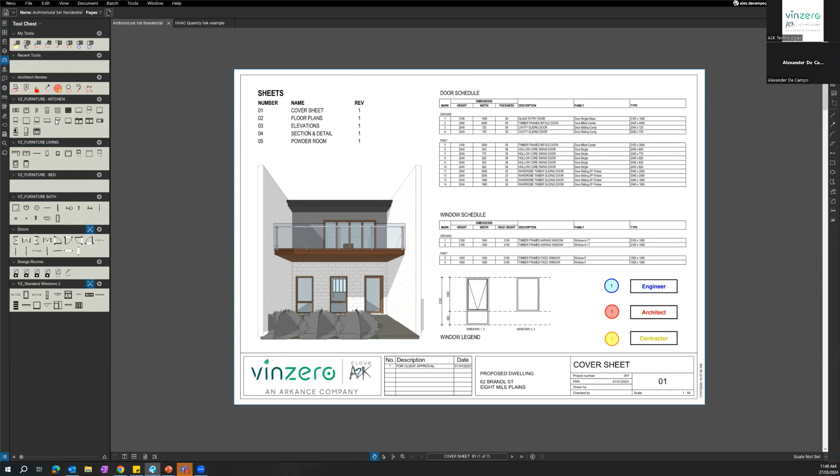Firstly, look at our tool chest, because these tools are how we speak to the program, how we add our context in. Typically on the side, for any beginners, our tools on the right hand side, you can grab any of these tools from the top as well, markups, anything here, chuck it on the drawing, MS Paint style, pretty easy. Where Bluebeam comes in really handy though is you can edit these, fill them with colors, add customization options, dash lines, hatch patterns to the whole thing. They can get really unique. Doing that every single time you want to represent a certain thing is tedious.

So we have our tool chest. They allow us to save certain properties. This tool chest, for example, here in the tool chest panel, the architectural review, we can click on one of these, and that's the same as this tool up here, except it's preset to have a certain color attached to it.

We go back to our standard Revu profile. Our profiles at the top under the Revu panel. When we change profiles, we can change between these presets. So when I go, for example, between these two that I've established for myself, go to the engineering one, and I have a bunch of different tools loaded in that library.

So how we get that into profiles first, we can either just select the basic standard profile. This is one that comes with Revu. It's got these different tool chests. To move on to make a new one, click on that profiles panel, manage profile at the bottom.

Then add just a new one in there. You can call that electrical, for example. And so that's going to be our electrical engineering. We can then go into our tool chests, untick the ones we don't want to see. So I don't need these or these. I just want a few basic ones around.

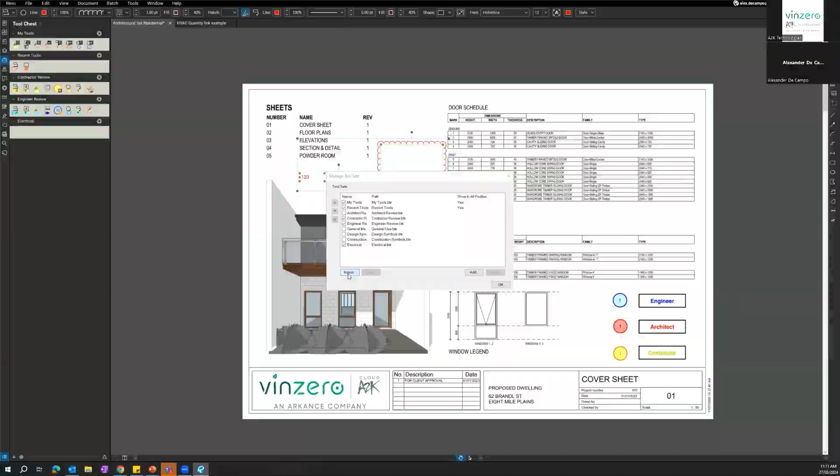How do we do that? Under tool chests, manage, select the one you want to share, click export, and then that pulls it out of the program. You can save it anywhere on your computer, send that file off. When they get it, they do the same thing. They go tool chests, manage, and then import, find whatever one that you have shared with them, open that up, and then cool, you've loaded in your new tool chest that way.

It's very quick and easy. I can chuck any of these symbols in anywhere I want. I'll go back to my other profile being just that standard Revu profile, and I'll use these as a good example to start with. If we go down to, where's my panel?

We run into a natural issue. One of my toolbars is missing. Since I ran through it, I'll move to show you what's going on. Under tools and toolbars here, the status bar, you can turn that back on. That's what I was looking for. I didn't have it up.

There we go, sorry for that. Sweet, turn a few of these back on. I was having graphical glitches, but now it's back and I can see the thing I want to see.

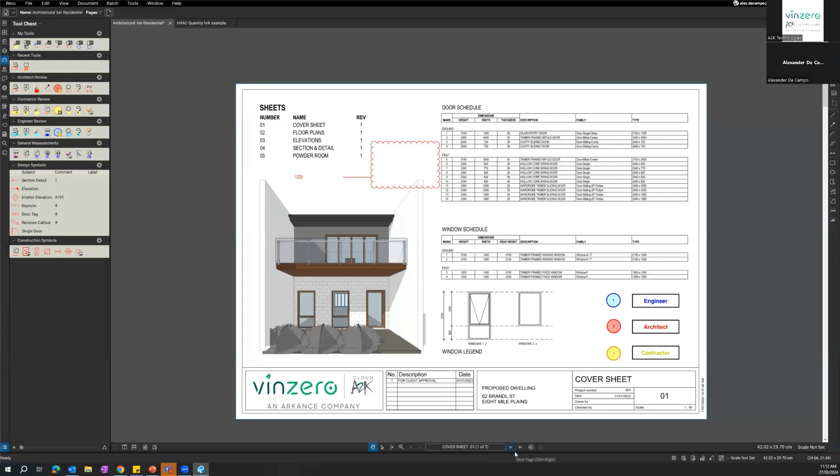There we go. Now from here, go to the next couple of pages. Here's a page I created earlier for you all. Nice and messy, right? It all looks really just like gibberish. That's just a bunch of these different tools placed on.

The reason I do that is so we can show you this markups list, and this is the next step of the process. Once you've gone through and placed your comments, arrows, engineering review, highlighted something of interest, or clouded something that needs to be looked at, and everyone's gone through—multiple people in one PDF have done that—it becomes really messy because everyone's working on the same page.

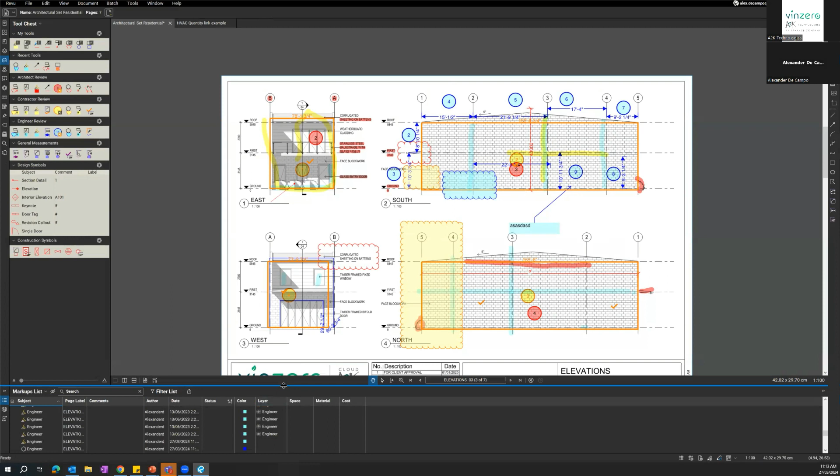So how we can filter that out is where the markups list comes in. You can bring that up by clicking on that blue bar at the bottom, and that'll bring it right up. We can stretch it out, or push it to the side to have more panel space if we want. But yeah, so there it is.

We can grab these and actually use this to filter the data. So first of all is by subject—everything in this tool chest has the same subject, so I can filter it out and see on the side all these markups of architect. Whenever I click on one, it shows me where it is in the actual plan. This markups list is basically just a big library of everything we've actually drawn in this program, or onto this PDF.

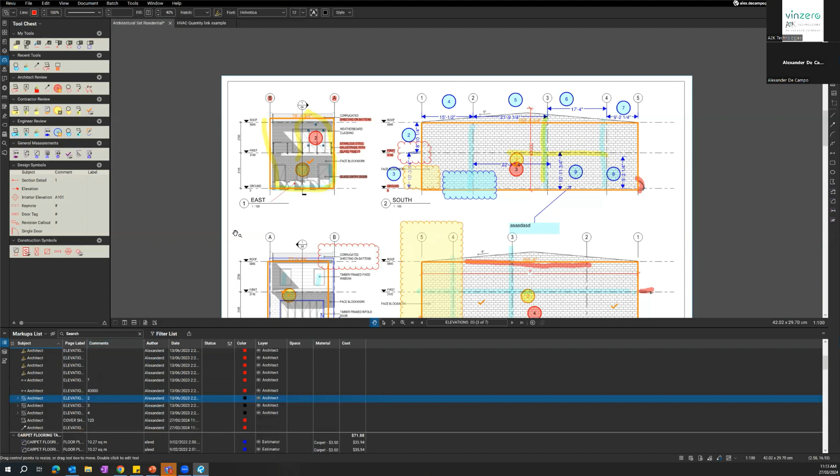So I can select any of these. I can select this architecture one, and it'll drag me to where it's been drawn.

Now for filtering, and where this comes in handy, is under this section here. So we can select filter list and select on the side here above the subject, and we'll have this drop-down box option, so we can select them one at a time. So if I select architect, everything else becomes grayed out, and now I'm only looking at one thing that I want to see.

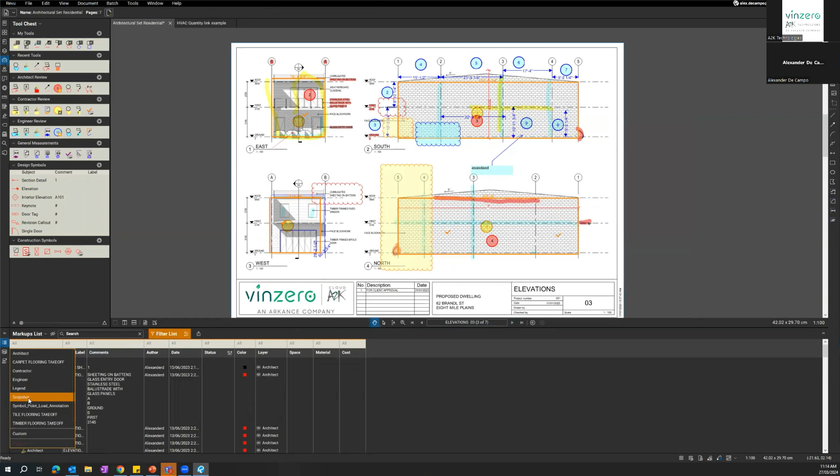I can filter out by engineer as well. I can filter out by the same contractor, and even two at once—so engineer and contractor—and now everything else is hidden. I'm just looking at those two.

So that allows everyone to actually work on the one PDF really easily without it getting messy. Otherwise, the alternative is you have four different sheets for every different industry doing their own comments, etc., and it gets really hard to know what the most up-to-date version is. Now everyone can work on the same page, and we all know quite literally the same page.

But yeah, the next part then—so that's the easy bit, placing your comments, etc. How we get more dynamic info use out of this is with our statuses. So this is where project tracking and management comes in.

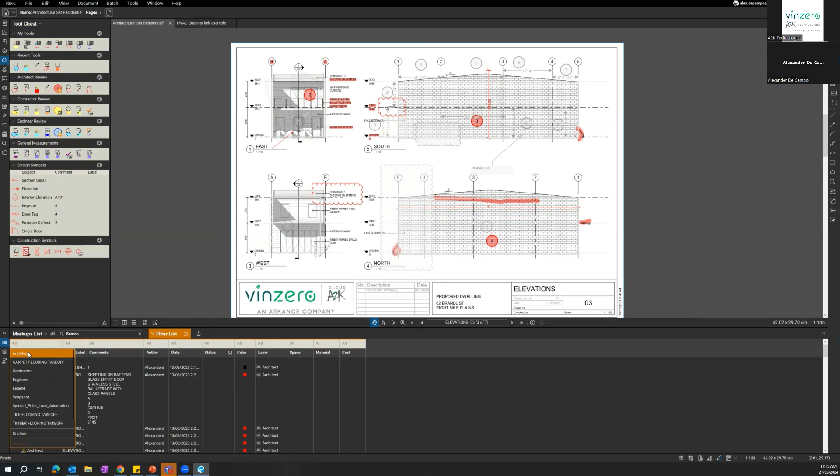Say on this page I'm going through doing my review of each markup as they appear. Let's get rid of those. I want to go down here to this page and say this markup—it's my job now to approve these changes that have been drawn in the drawing. So the way I do that is with my statuses.

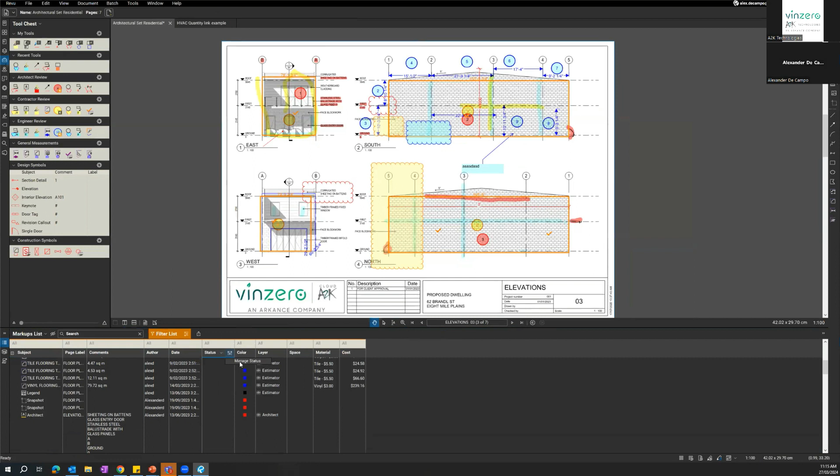So we'll start by creating them by clicking on the status bar here in the markups list and the filter option. We'll click manage statuses. Then we have a pretty standard one—this comes with Bluebeam already: accepted, rejected, canceled. We can create our own list too, so we'll just click add here.

The model is going to be engineering review. So for this we'll have a few different stages—these states on the side are sort of the stages they can sit at. I'm going to add a state and call this...

Accepted, because it's been accepted for it to progress. The next one will be rejected, as in that markup—we don't want that to continue through the project, we don't want those changes to be implemented.

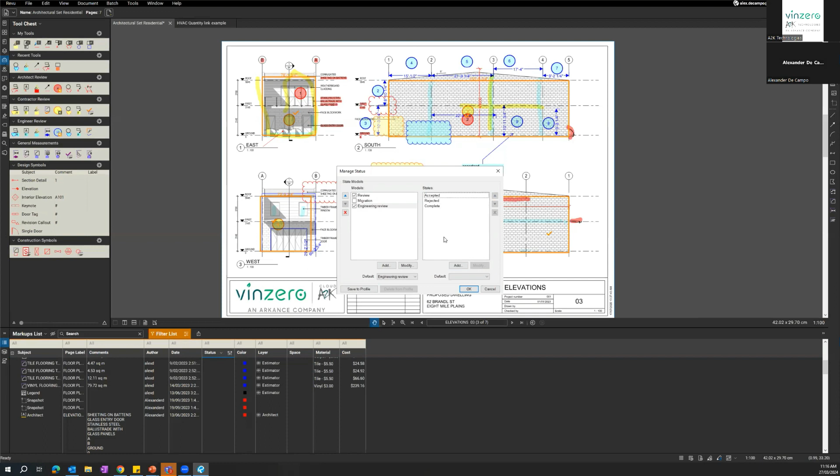And then the next one will be complete, where that change has been implemented into the actual drawings and they're done. Just as an example, you can see anything can be done with these, so it's pretty simple.

But from there, how do we use it? Now that I'm looking at this drawing, I'm going to go through and actually make those changes. I can select this one, right click on that and say, yep, I've looked at this and I want it accepted. I've accepted it, so I can set that status with engineering review as accepted now. And that appears here in the markups list with that information.

Same thing, find another markup. Yep, that one's good to go. Status, engineering accepted.

As I go through, it's kind of hard to differentiate what I've accepted and what I haven't. So that's where the filter list actually helps in this case as well. I can filter by only accepted or only blank. And so when I filter by blank, you can see the ones I've accepted go gray. So now as I tick things off and go, yep, this one's done, it goes gray, knowing that I'm finished with that. It's a really easy way to see my work as I go through this file.

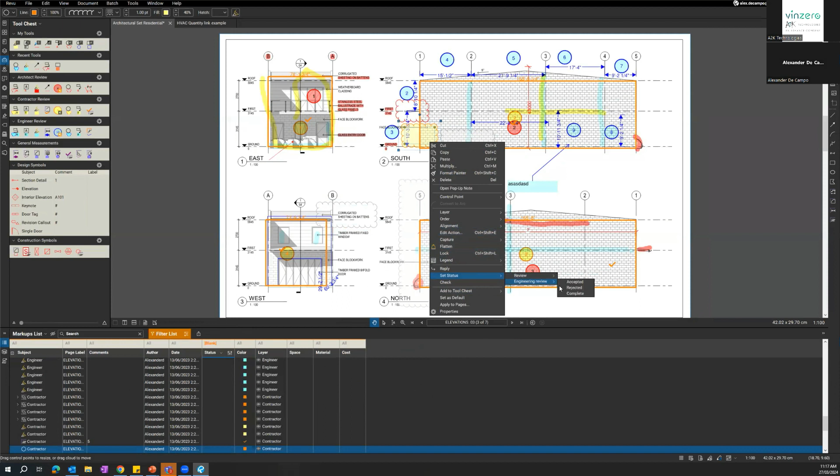And then let's add a few more, go rejected. If you go through page by page, that seems like it might take quite a while, right? Doing it that way, but if you're certain that an entire page is good to go, you can set the status for all of them at once to be accepted. You can set all these, maybe this bottom right half is rejected.

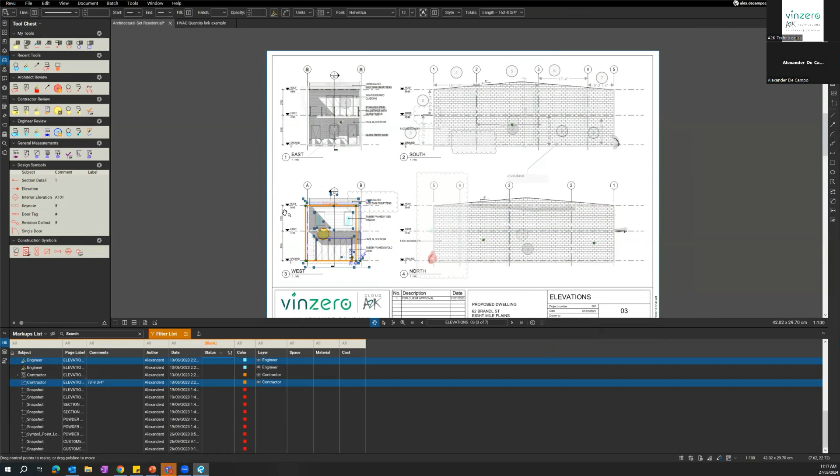And just for the sake of it, we'll say this bottom part's been done. Select all these markups at once, just by holding shift and then clicking and dragging to select multiple. So right click, set status, and then those are complete.

So now I can see on this page, everything's been taken care of. I can unfilter that now just to bring it back to how it was and go through and do the opposite, so I can look at what's been accepted and everything else goes gray.

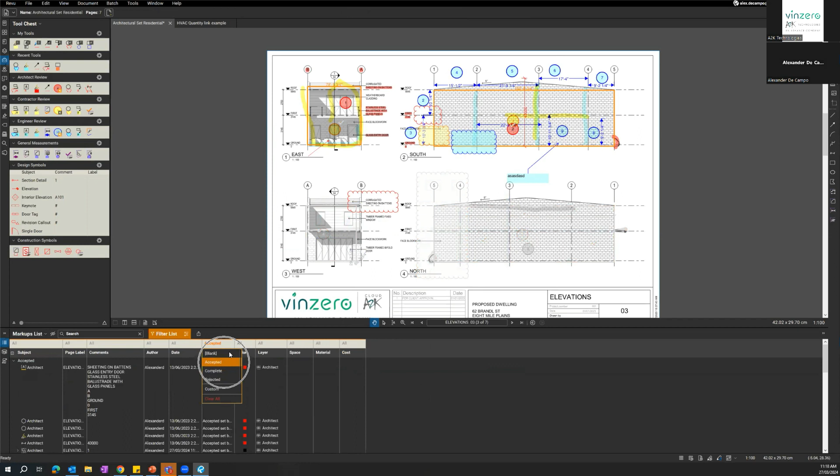I go, yep, these ones are accepted now, they're going to progress. I look at complete and I say, yep, that's how much of it's been done. And then I look at rejected and go, okay, these ones need to be sort of stripped from the record or whatever, right? So yeah, that's how that system works. Pretty handy for that use case.

The next step from this is actually getting that data out a little bit further. So at any stage we are at in our project, we can use this tool to extract some information. So in the markups list, I want to use the summary tool and I want to go to a CSV summary.

There's also a PDF. I'll show that very quickly so you have an idea what it is. I won't fiddle with the settings, just click OK. This isn't what I want to show you, it's just so you are aware of what it is. But this will create an export and a summary PDF of everything we've made and what information goes with it.

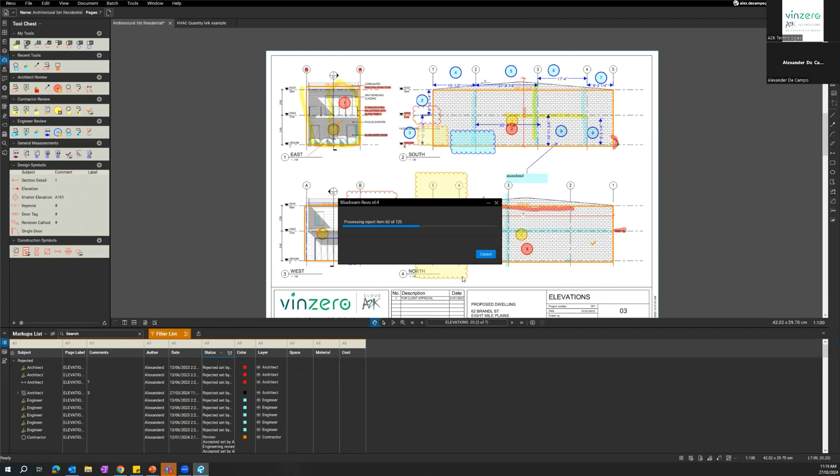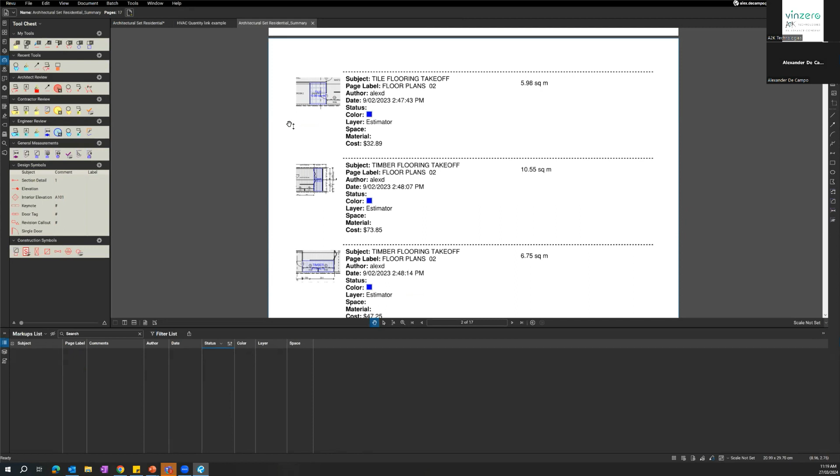So just for the example, you can see at the top here, this is the markup summary. We've got, this was placed by the contractor, it's on this sheet, it has this status, etc. So it's just a big list of everything. If you're doing takeoffs, and I won't touch on it, but you can see it has a cost associated. That's the sort of thing that is possible with Bluebeam. We're not covering that today, but just so you're aware that's there. But yeah, that's how that PDF system works.

What we want to do is create an Excel summary because we want to actually take all that data and chuck it in like a table or a pie chart or something so we can show the boss how flash we are. So, CSV summary, and this is where we look at the settings.

So what we want to do is include the markups. The main settings we're looking at are the columns and filter, so this is actually what information we're getting in the export. Otherwise we'll just get everything and it'll be a bit messy. So in columns, you want to decide what's important to us. We're not looking at materials and costs, so I'll turn those off, untick those.

Space isn't what I'm using. Layers, I think, are sort of active. The color is handy to leave on. Status is absolutely, the date as well - these are all good things. The authors as well, so those are the main ones you want. And the subject is key.

Filter and sort - this is how we actually filter the data itself. The columns is just filtering what we see, and the filter is filtering what information is being exported. It's a bit hard to explain now, but basically when you export, these are turning into your columns in Excel. So you have a line, it'll tell you all these information pieces, and the filter is saying this isn't going into a file at all.

What I want to do is filter sort of negatively, so I'm going to untick all and just select the ones that are relevant - just these types: architecture, engineering, contractor, and I think that is it. Yep, sweet, so just those three, because everything else isn't relevant to the information we're filtering out.

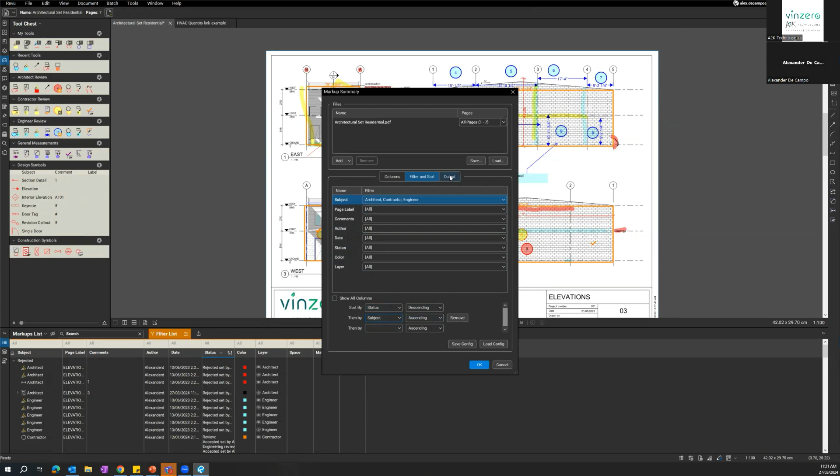But yeah, from there, pretty simple, that's all we need to do. We'll just click OK and get the product out now. This will create our Excel file.

There she is, beautiful. So now we have a lot of raw data that we can apply that function to. We've got the subject on the side and the statuses that are applied to them.

Now, I'm not here to demo Excel so I won't go too into it, but basically you'd want to grab all of this column and then sort of this column. I'm terrible at Excel, I'm going to embarrass myself further if I continue. But basically, when you are here, you can filter by those statuses and get a count, pie chart - 50% of them are completed, 10% of them are rejected, etc. I'm too incompetent to show that side of it. I'm a Bluebeam guy, not an Excel guy.

So yeah, that was a quick down and dirty for that first step. That sort of shows you guys how that system can be used - mainly, like we said, that statuses system, and then getting that export out if you want to bring a report back to the boss. The filter system's really good, you can use that in multiple ways. Like I showed you, you can turn it off so that you're only seeing things that haven't been edited yet, and then those are the ones you need to work on, etc. So pretty cool.

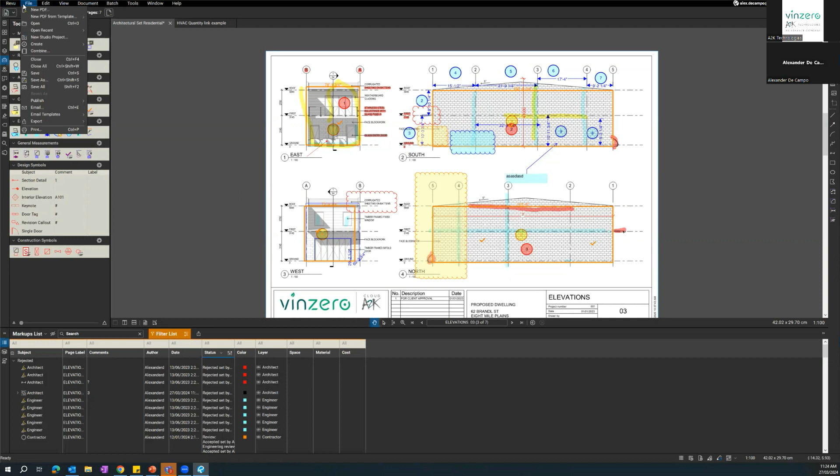Sweet, so let's chuck back Bluebeam on. Check. There we go. So from here, I'll open a new file and just use that as my baseboard. You can do this multiple ways. Not new, sorry, open this way. I know where I saved it, I'll just find it in here somewhere.

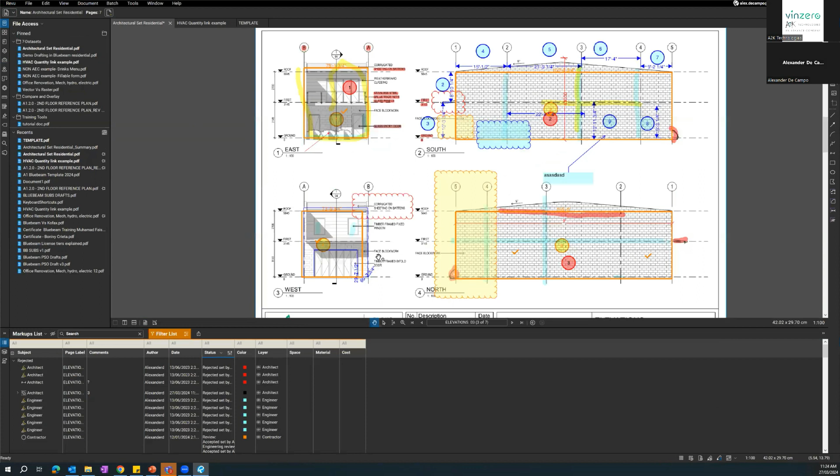Template - this is the only one, so this is just a blank template I prepared earlier. You can do this multiple ways. If you haven't got a blank title block you want to use, another alternative method is to go to your previous drawing, go to page 1 here, and this is the title block I want, but there's info all over it. No worries.

At the top left, we have edit, PDF content, and erase. So I can use that erase tool to just chop out all this nonsense that I don't care about anymore. And then the markups stay, so I can just delete the markups.

Same thing, right? I've just chopped everything out, and now I've got my blank title block that I can use. Easy. Now I'm just going to use this previous one, and in here we've created our blank page.

We want to draw onto this frequently, and be able to bring it up any time we need it. So we want to turn it into what's called a Bluebeam template that's baked into the program, so we can call on it when we need it. But before we do that, there are a few things we can do to make this more useful.

If you want to make it a multi-page PDF, go to the thumbnails panel—this is where I look at my PDF as a whole. Maybe I want to copy this and paste it, so I've got a couple of pages already ready to go. That way you can bring a template in and have multiple files ready.

Within this as well, what we want to do to make it more useful—every time I load this in, this information is going to change: the location, the industrial park, etc. That's not going to be the same every project.

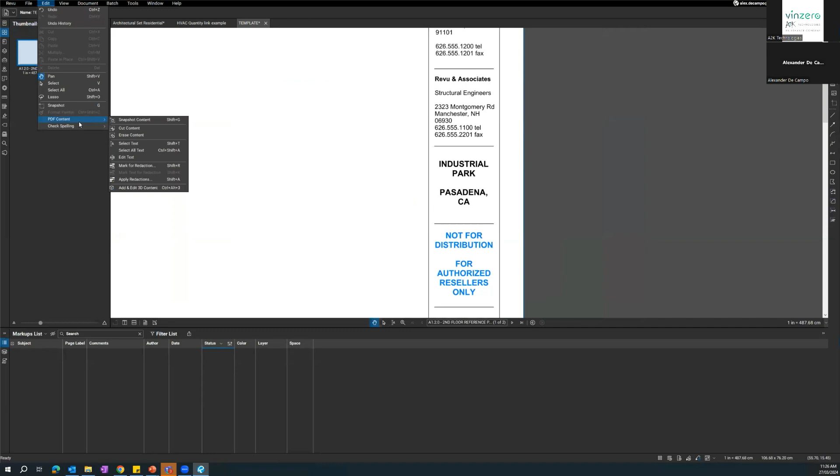That needs to change. One workaround is similar to the tool before: edit PDF content, then edit text, and we can just rewrite it. Say this is 21... I won't say it, 21 Jump Street—that's the street we're on, that's where we're looking. You can just edit that file really quickly.

That's one way. The other way is more work now for less work later: actually replace this text on the side with something more useful. To do that, I'll erase that content. I'll only do it once since it's the same process for the whole PDF, but this is what we're going to do—create a spot where we can fill that information in.

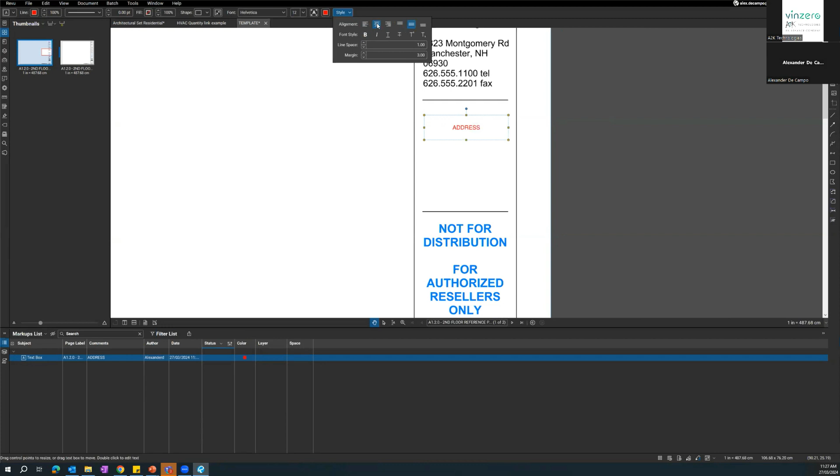I'll just create a text box and type in 'address, project address.' I need to format that text box how I want it—change it to be centered and aligned in the middle, make the font size a bit larger, 18, and make the text black. Now we've got that ready to go.

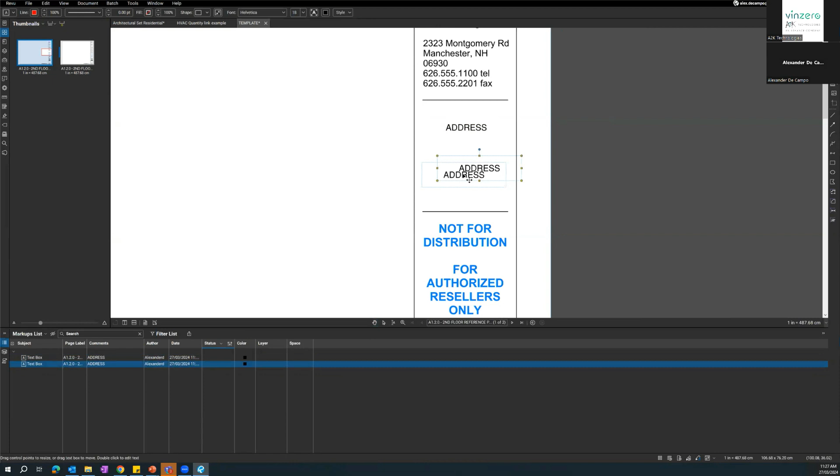And I can copy that text box down below it and across. Sorry, there we go—and then that's address line 2. Why does that happen? Thank you.

So now with that, it looks pretty much like it's meant to be there. Except anytime I want to use this template in the future after I've saved it, I can just double click on that box and type in whatever I need. So it makes it easy to fix.

The second part of this is the fancier part. If you want to get really in depth—and I won't go too hard on this—we can make these fields dynamic. You may want to just do what we did before.

Let's delete that page, and I'll duplicate this page real quick, so I've got two pages with the same thing on it—they've both got this system. Whenever I change the address on this first template to 21... I won't do it again, or street, it doesn't change the second page. But for our title blocks, we'd want all that information to be the same.

So it is possible, it just requires—and it's a complete feature—the use of form fields. This form field is on the side; we click on forms, then click at the top for a text box. I'll click on that text box and draw one in where I need it, over here, and that will create the form field on the side.

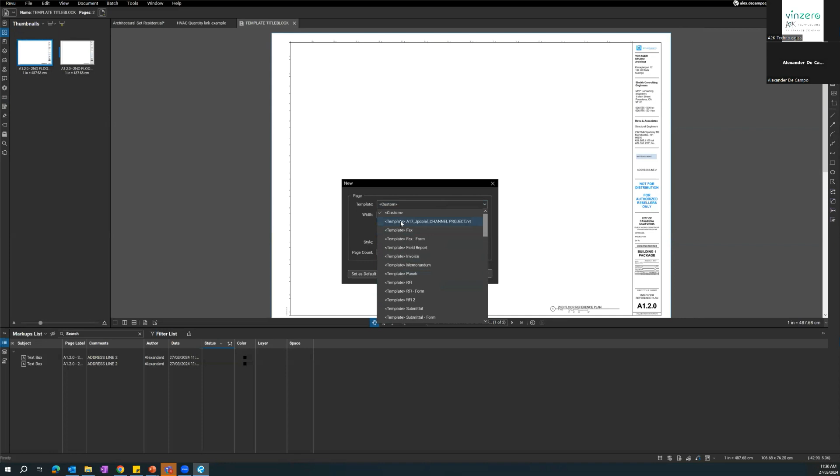And now that's a template, we can use that. So when I go to File and click New PDF, the pop-up comes up here, and I can select from these templates any that I've previously created. For example, I have a field report template. I can open a new PDF and it opens this document anytime I need it, so I can create these really quickly.

But the same will work for the previous type. The next step is actually filling this in with some information. So we've made our template now, we've brought a new file in, and we want to draw on it. So that's good - we're going to use our tool chest for that.

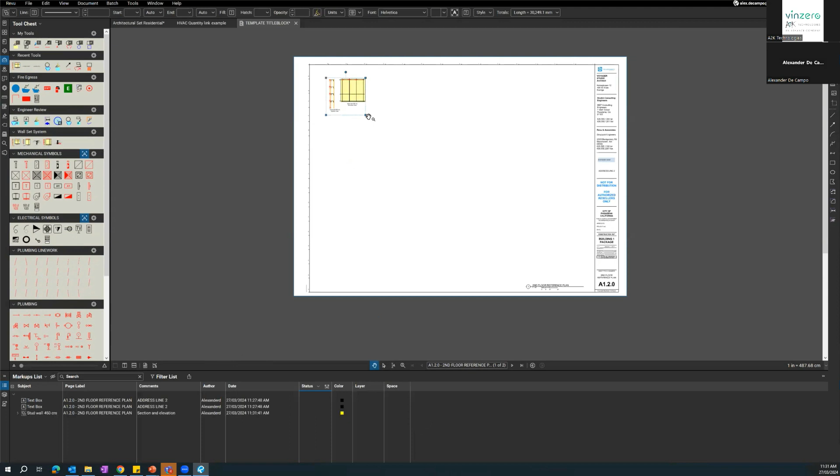I'm going to go to my other profile, engineering, and this is where I have a bunch of tool chests preloaded. This is just to show you what's possible because tool chests are really dynamic. I can bring in an entire diagram whenever I need it - a full wall set system - bring these side by side, and I'm basically instantly drafting right now because I've pre-saved what I need. Certain details that I know I use all the time, I just chuck them in, load them up, and use them over and over again. Pretty handy.

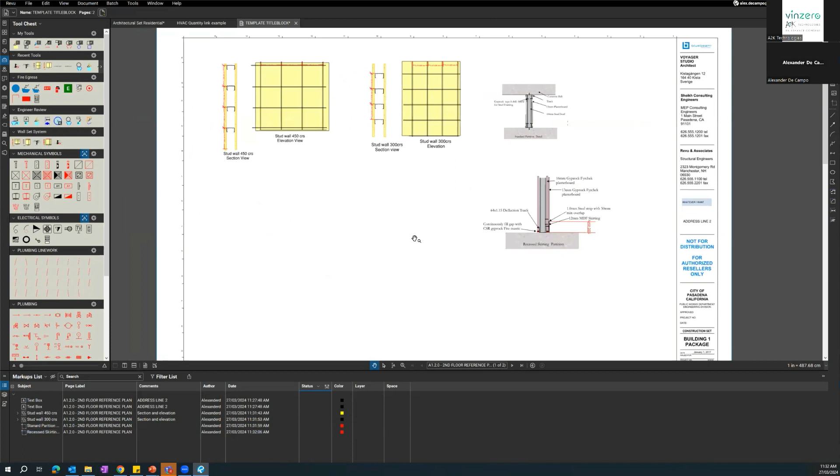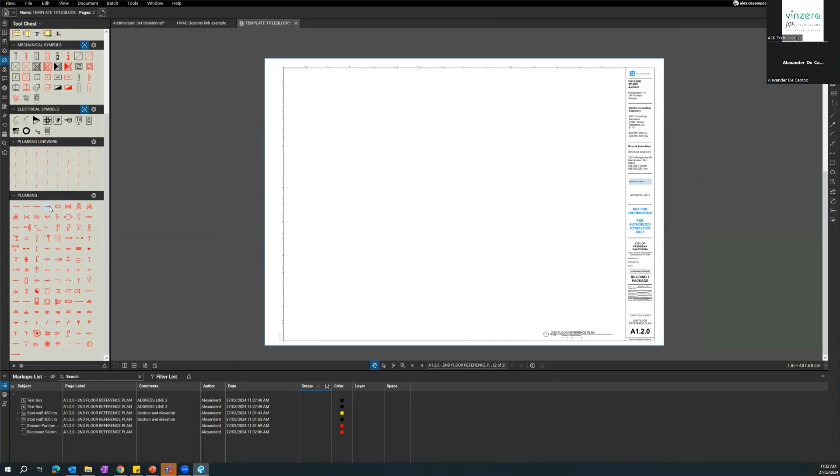So these tool chests, that's the level of detail they can go to - massive full-on sets. The second side, for example, if you're doing an engineering workflow, we've got our plumbing linework, our plumbing symbols. So we can do a bit of a diagram, go to the next page, and start doing a rough diagram. I'm not a plumber, I'm not a plumbing engineer, so this is going to be a bit rough from my side in terms of getting this accurate.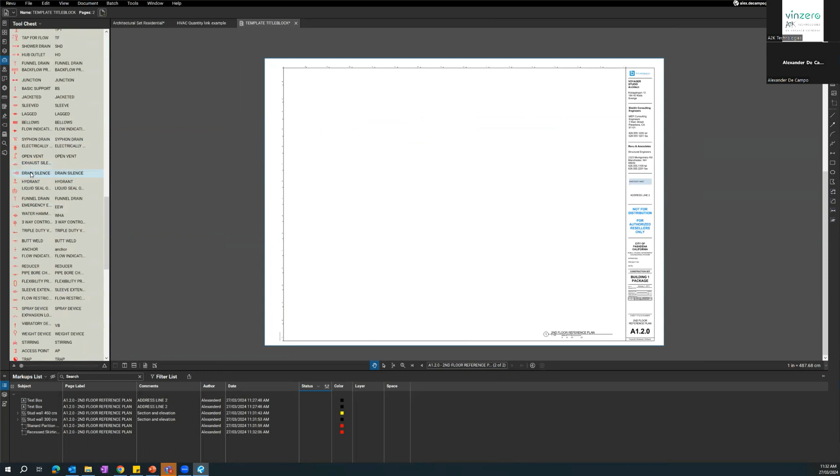But to use these effectively, the second thing we can do in our tool chest is click that cogwheel and click Detail, and that'll give us a lot more information on what we're looking at. We can see all the way down, I've got different symbols and different things. So let's say I want to chuck a butt weld in - I want to go to my second page, and I might increase the scale so we're not looking at very tiny stuff.

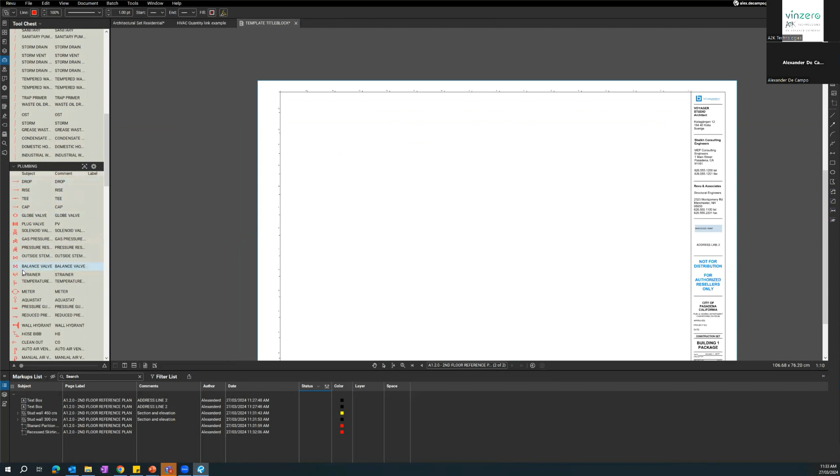This was pretty weird, but it'd be fine - okay, it's not gonna work. Oh good, so we'll zoom in and chuck a few of these symbols on: an outside stem, a meter, wall hydrant - because I'm sure all these things are very typically drawn together. Of course not, just to show you how it works, right?

I'm not really able to give you the industry side of it, but this is how Bluebeam works, this is how we're going to use it. You want to click on one of these, so pick maybe a certain type of pipeline, and you can draw between them.

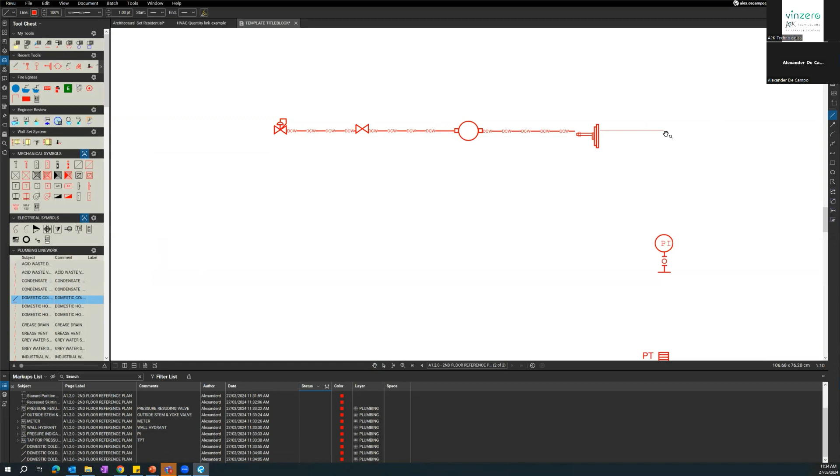So yeah, maybe not a typical hydraulic drawing, but that's how we can use these tools. I've got different types of tools, symbols and line work, that let me really quickly draft sort of stuff like that.

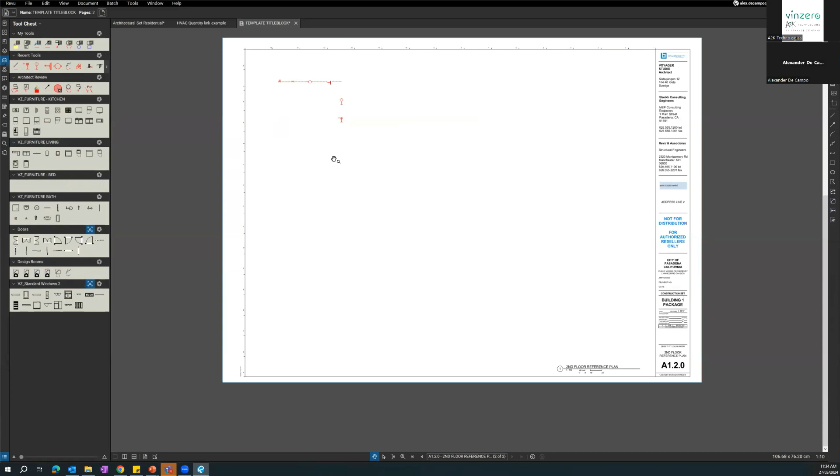To use something from my own industry, this will make more sense, something I actually understand. But from an architectural perspective, if I swap to my other profile, I've got all these tools ready. I'll get rid of that cheapy diagram, look at my detailed view for this one, and just draw up some runs.

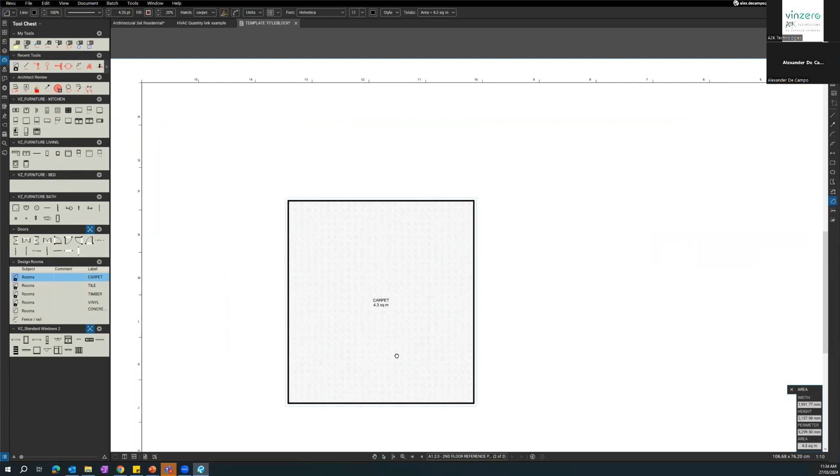So I can chuck in some carpet, a huge gigantic carpet run. Let's go 4.3. Tile, and then vinyl.

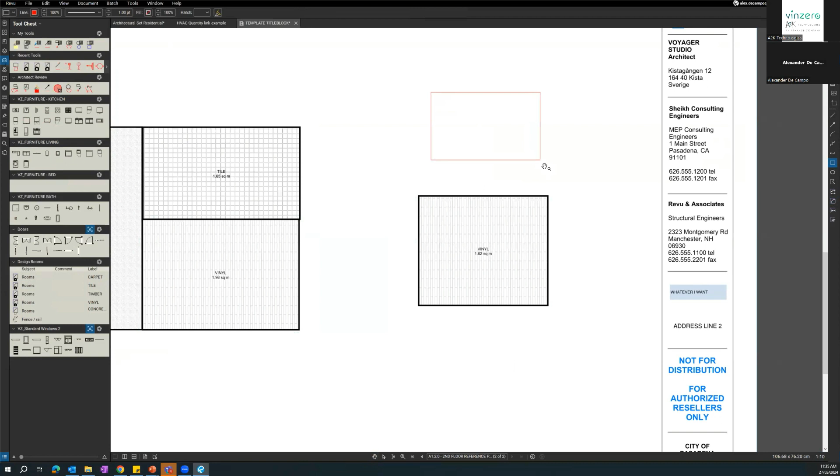So I've made basically a box, added a hatch pattern to it. If we just edit the same thing, this is just this square tool with a few extra steps. See how effective it is? Looks really handy, looks pretty good.

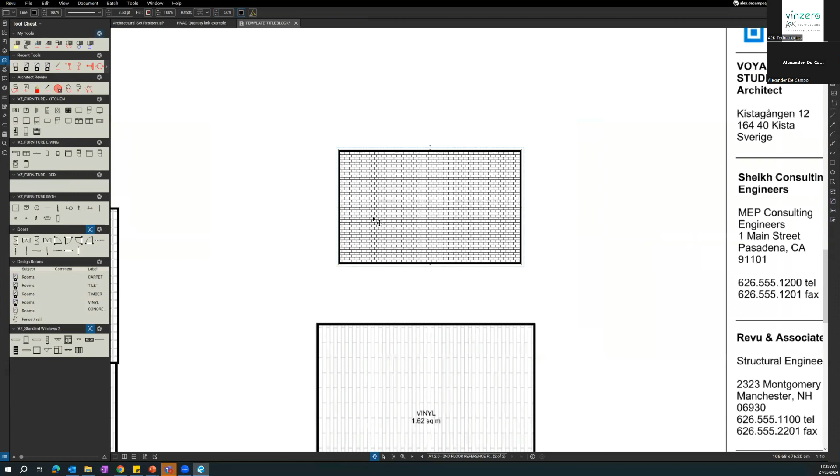That's just this, except I've made the line really thick, made the line black, added a hatch pattern, and reduced that hatch pattern down and made that black as well. Very quick and easy, but I've got these pre-saved to use.

And then same for my tools, I can chuck doors in. Well, 1 to 10 is not going to work for me.

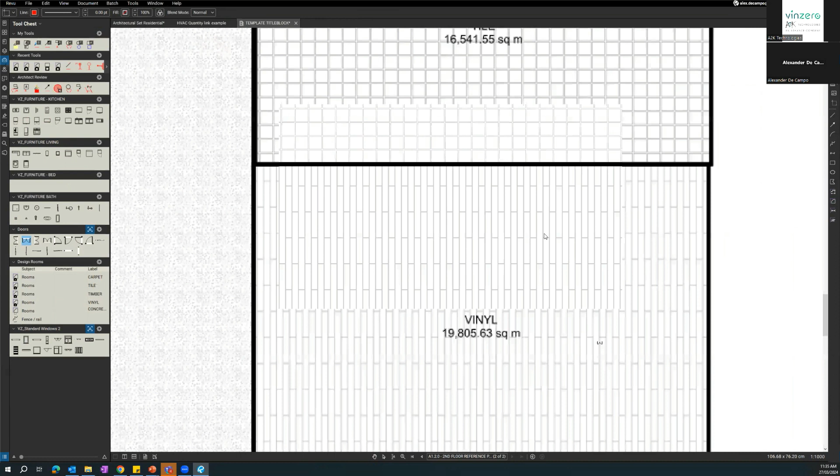Let's redo that scale. Now I can chuck a very tiny door in. 1 to 1,000 is not what I wanted. 1 to 100, apologies. There we go.

Just trying to show you very quickly, you can grab a symbol and place it in your drawing where you need it, right? A bathtub, a shower.

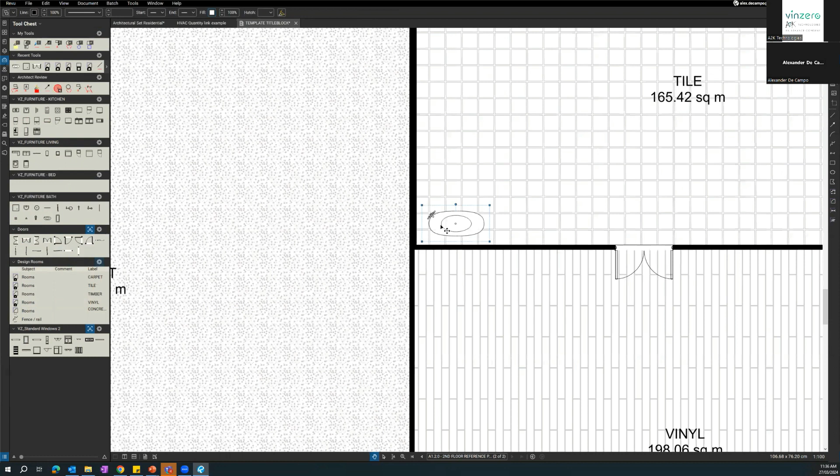Scale's all whack, but then we can fill these in with the color white so that it stands out from the background. Stick a sink on, rotate that sink, fill it in with white.

So you can see how I'm able to use these pre-made tools to actually straight up draft on Bluebeam alone. Really handy, really good way to get some quick drawings in.

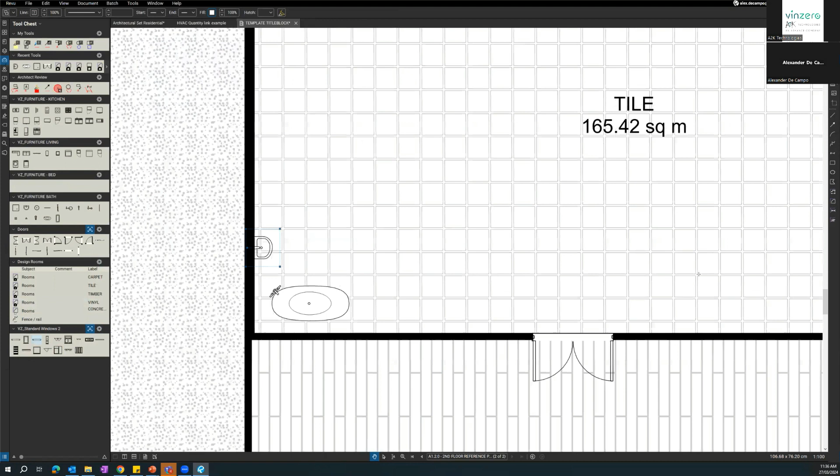I can chuck a window on, can't see it, fill it in with white. Now it stands out. Chuck the actual one next to it, have a little arrow pointing to it - this is what I want here, etc. I'm quickly able to draw a lot faster a representative sort of concept.

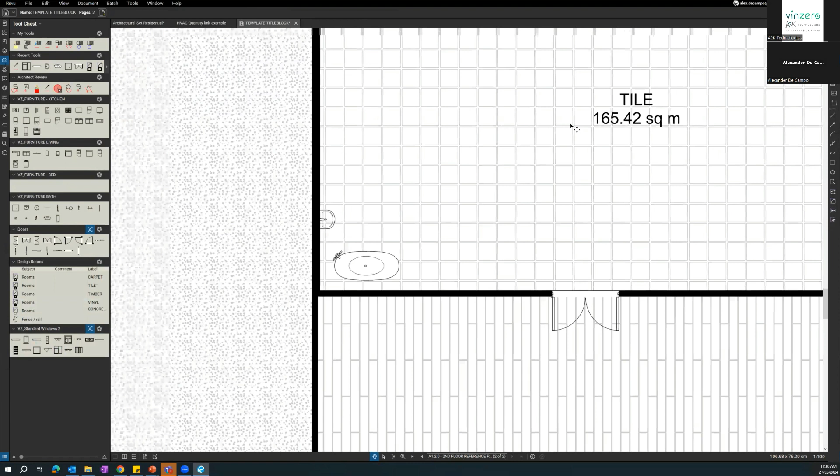We shrink this down in these sorts of ways, right? Anyway, the last thing we might quickly show for the engineering side would be an electrical sort of layout. If we go to context, we can do this on existing drawings as well with no issue. So find a blank page like this one.

If you're an electrical engineer or an electrician and want to draw your layout, I'm going to chuck my lights, my switches and stuff all over this drawing. I've got a tool chest for that. Bang, let's go to the other profile. Oh, whoopsie, come on.

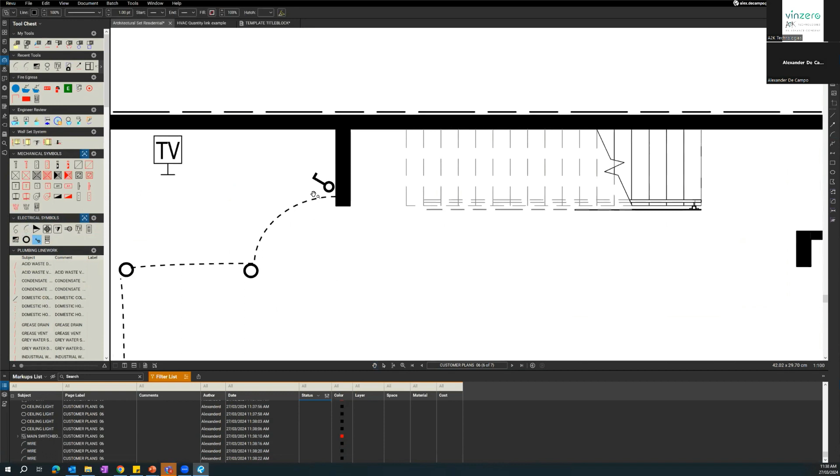Quick layout. How do you make these tools? So the idea of this session is to show you the very vast possibilities, but the quick rough down and dirty of how these are made. It's multiple sort of approaches.

The first one is screenshotting. So if I want to use this door ever again, I can click edit up the top and snapshot it, copy paste, and then that is like a tool I can use.

I can add that to my tool chest somewhere with my tools at the top. Select that, now it's available - anytime I want to use that door again, I can use it. So that's the easiest way, having a sample that you can draw stuff from.

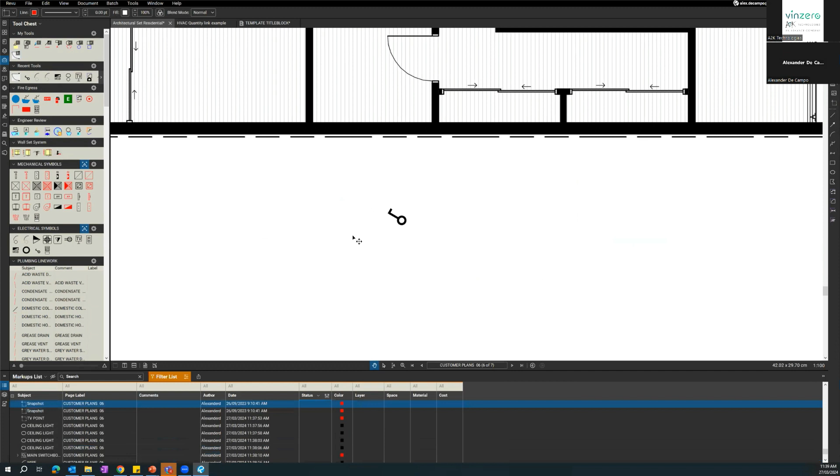The second way is to draw it, because drawing it adds additional functionality. For example, I can change the line color because it's drawn, it's not a flat image. With the screenshot, for example, I can't do that - I can't change the line colors or any of the types.

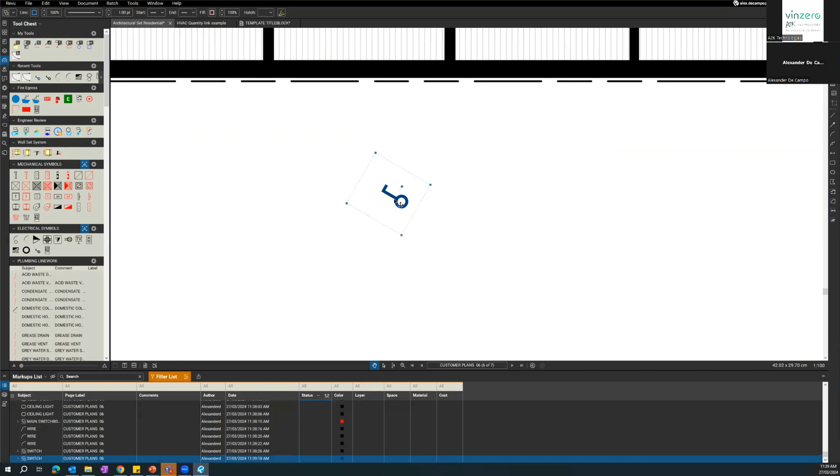It's a flat image. To make these, it's just a matter of drawing with your simple tools on the side - start with a circle, add another line, add another line.

And then shift click to select them all at once, right click on it, and then click group. That creates a group. This is now one image or one item that I can add to a tool chest and use whenever I need.

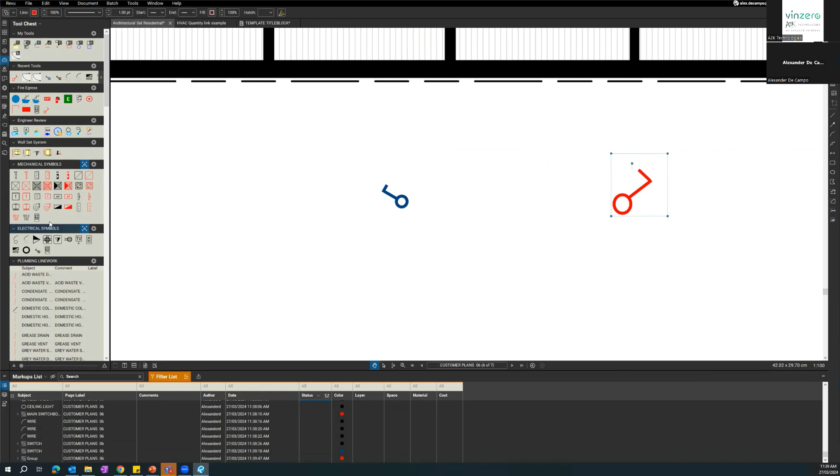So there, the fire egress, bang. For something like this, this is a straight line. I want to draw from here to here to here and then out. That's my evacuation plan. Again, all that is a polyline. So that's on the side. This is the basic tool. I draw a polyline in the same place.

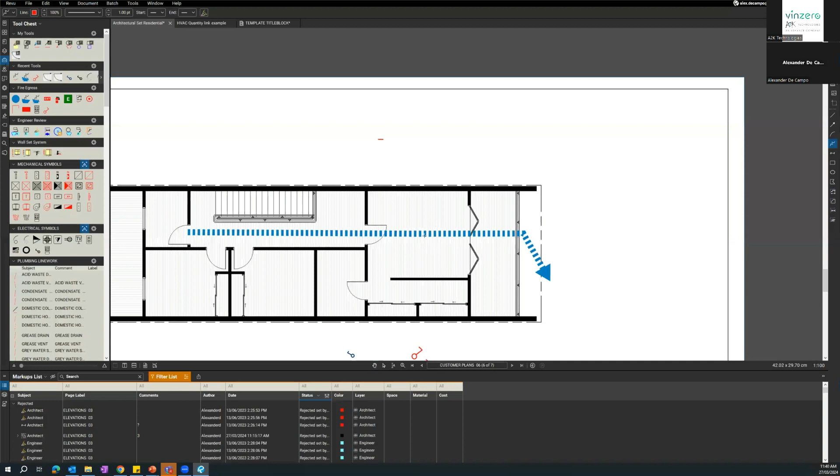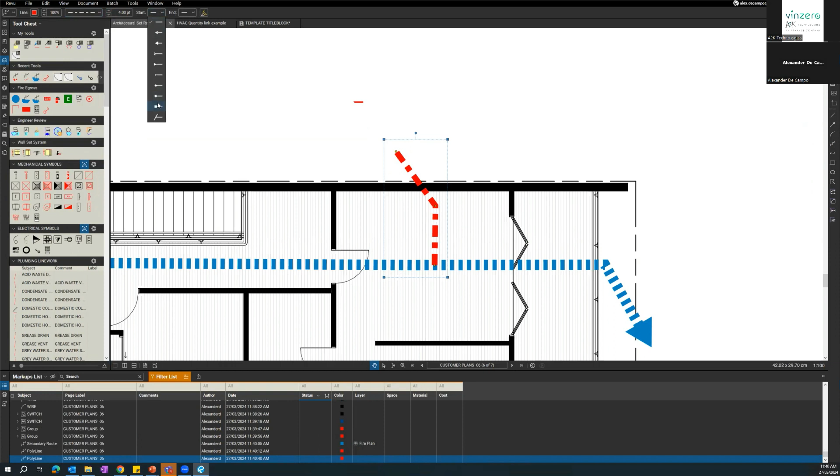Up, yeah, out this way. All I've done is increase that line thickness here, change the line type to something more fitting. I might not have the exact one available, but to show you just the mechanics, create that certain line type. Change that start to maybe a dot and the end to an arrow. Reduce that a little bit and then change the color to blue. And you sort of get the idea. We're getting there, right? That's just a very quick way to do it, but it's just a matter of playing with your tools until you get exactly what you want and then saving that for use later on.

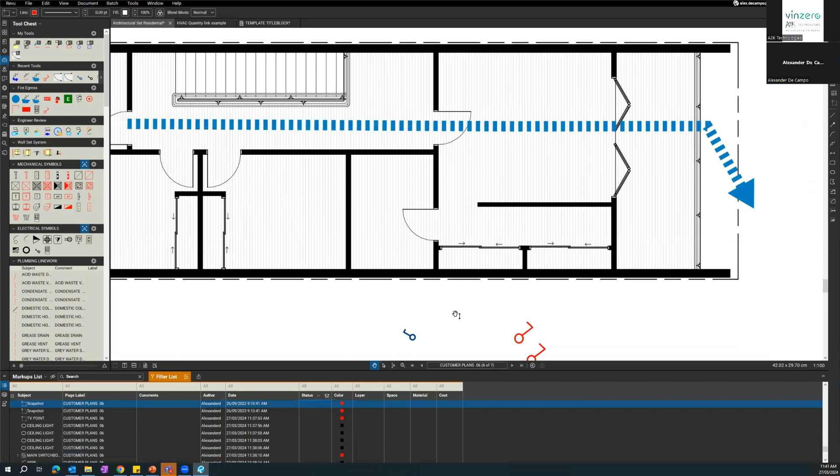Now the next one's a really cool one. Again, I've shown this similarly before, but this is how we're going to use it in a project context. We have a drawing where we need to compare drawings we've received from someone else to confirm that things are in the same place. And we also want to confirm that certain things like HVAC and lighting are not colliding.

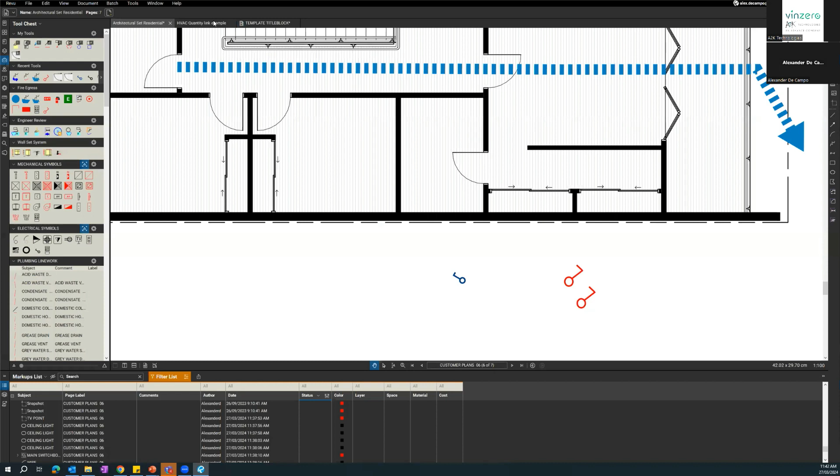Let's jump back in and go to our other drawing. So this is an example data set of a large project. It's got 50-ish pages. I've bookmarked them on the sides so I know what I'm looking for, but these 3 pages are what we want to compare. We've got an RCP for our electrical and our ceiling access and exit signs, etc.

All of that's drawn on here. We've got the below image, which is more of our HVAC ducting and our vents and where they're going to be. And you can see on this line as well, for this drawing, for whatever reason, has some of the lighting in place. So we're twofold.

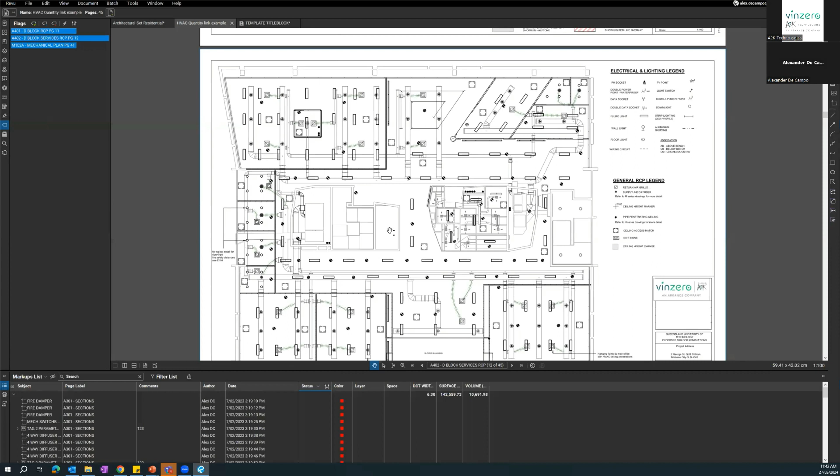We're going to be able to make sure that this drawing that came from consultant 1 has the same locations for their lighting as the people that originally gave that file to them. So we've got a lot of people working on this, want to make sure things are lining up, and we want to make sure they're not colliding. The last one is then a more detailed HVAC drawing at the bottom, maybe an existing drawing, maybe one from the engineer later on, and we're just confirming that things aren't going wrong.

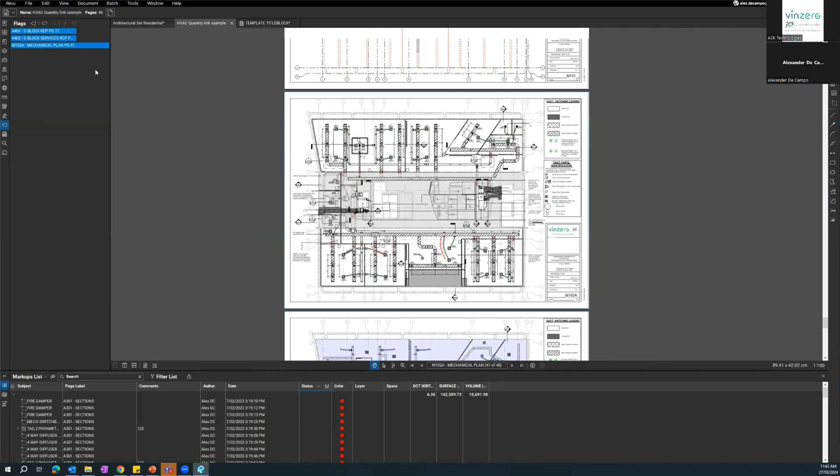So because these are all in the same PDF, for us to compare and overlay them, they have to be separate pages. To do that, we're going to grab these pages and extract them. So I know it's page 11, page 12, and page 41. To extract them out of this document, I'm going to go to my thumbnails panel. Go 11, 12, and 41. I've got to remember that, 11, 12, 41. So grab the page we want.

You can start this process anywhere. Just right click in your thumbnails panel. We're going to click extract pages. And then we can do a custom range. So just by typing into this field, we can go 11, 12, 41, and that's going to extract those 3 pages. We can choose things like delete our pages after extracting. We don't want to do that. We do want to extract them as separate files, because if we extract them as one file, we're just back where we started. There's no point. We're separating them into 3 different PDFs that we can then chuck on top of each other.

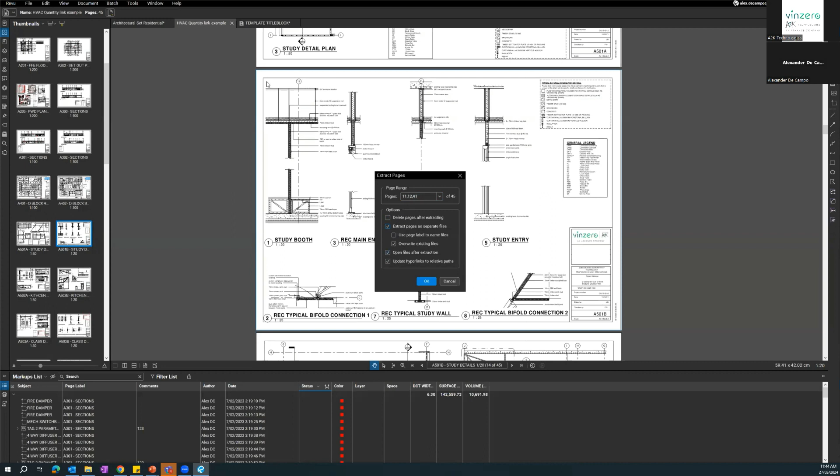Cool, and we want to open them after we've extracted them so that they all just pop up here into our program, easy to use. Just run that. I'll save them to my downloads so I can get rid of them later. Now these 3 have popped up at the top of my screen. See in the thumbnail panel, they're by themselves. Each of these is just one document.

Cool, let's just close everything else. Whenever we're doing overlay, I recommend just getting rid of any other open files because they just make it messy, it's a bit more hard. So we're going to go to View, Comparison, Document, and Overlay Pages.

So we want to add another one. We've got 2 in there at the moment. We can add more than 2, we can compare 3 at once. Add that last one, add open files, added it on. So we've got 11, 12, 41 here.

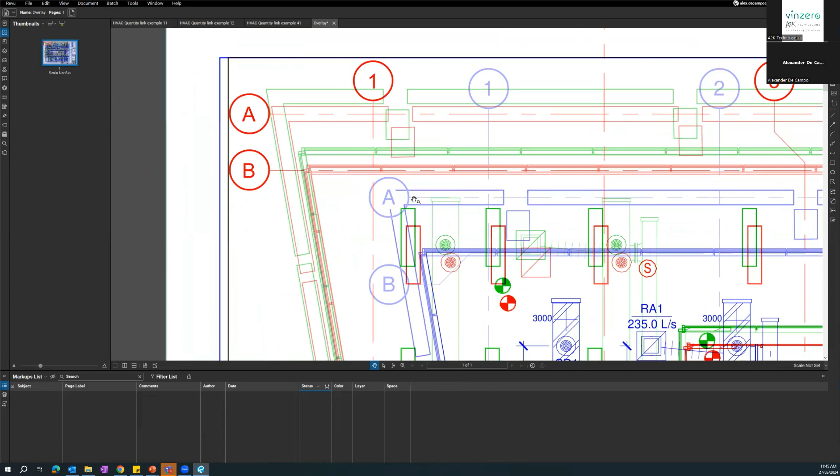Pesky architect in Revit moved that viewport to the right slightly, and now we have a mess on our hands. So that's okay, we can easily fix this on our own. Same place, Document and Overlay, add open pages, and we've got all 3.

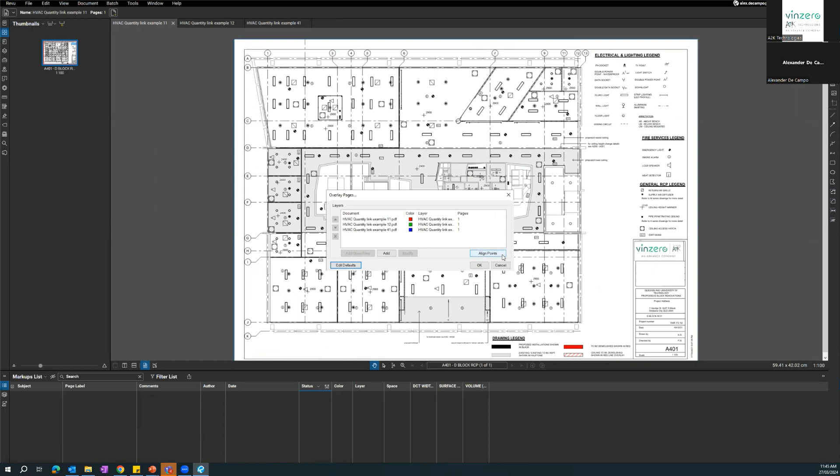The align points tool on the right is what we want to use, and we're going to select 3 points for each that we know are the same on each document. If there were grid lines on every page, that'd probably be a good one. But since we don't have all those grid lines, we want to pick something we know is going to be the same. So maybe the corner of this wall - from memory with this project, this was an existing wall, so that was the same for every consultant. We're going to use that to sync off, and we'll see if it works at the end.

For the bottom here, there's some options: snap to markup, snap to content. Snap to content's the one we want on, because you can see when I hover over it very faintly, there's a little box that appears. That means that it's going to 100% of the time be precisely snapping to the PDF below.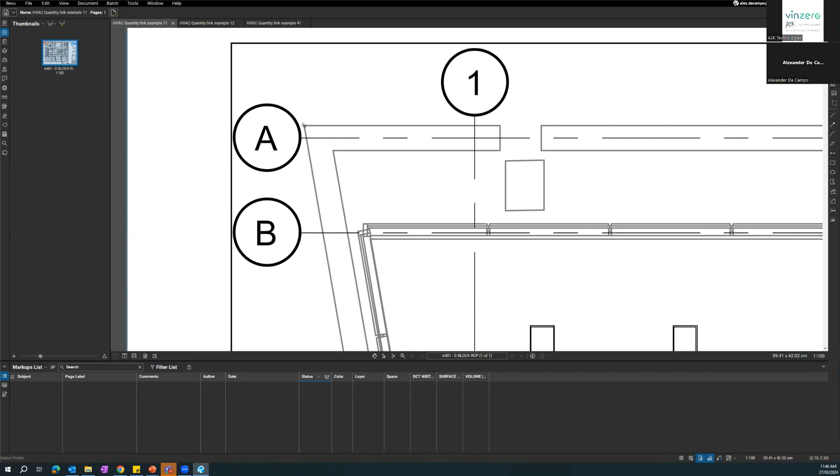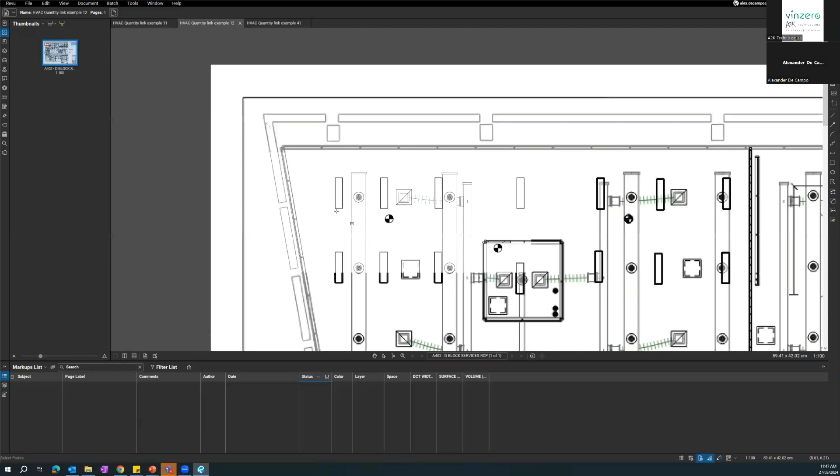So we're going to select 3 points, just the edge there, the edge up here. We'll use the column, and then at the bottom right, this column. I'm using points that are quite far away from each other because that will make it sync up more accurately. If you do 3 points close together, it might work, but it won't be as precise. So we want to select points that are as far away from each other as possible, and ones that are going to be the same on every document no matter what.

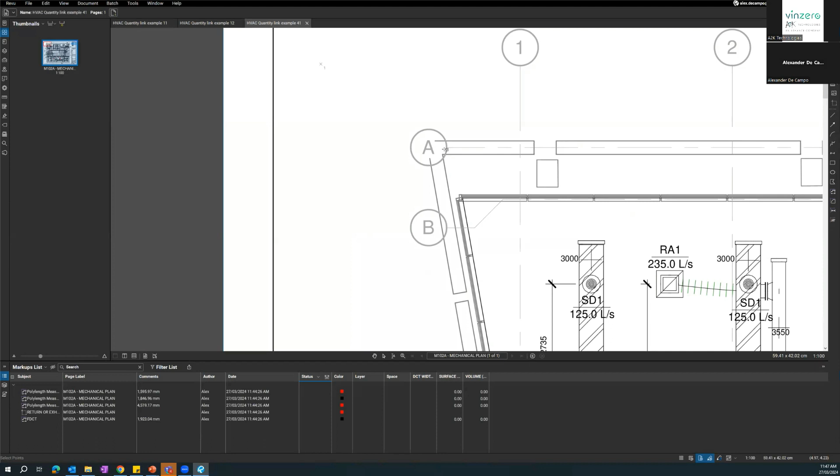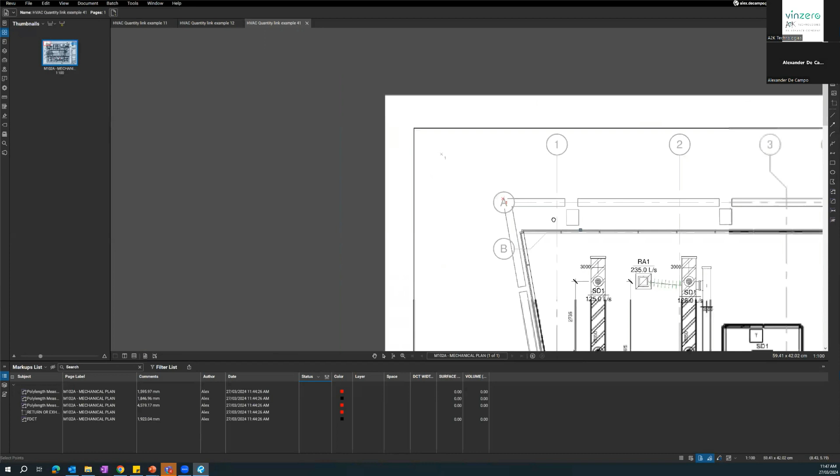That little gray at the top here, we can see that gray 1 - that's where we first placed our 1 point. So when we place our 1 here... there it is, the edge of that wall there. Unfortunately our text is sort of covering that up, doesn't make it easy. But that 1 will join with that 1, in the sense that this drawing will come up to the top left to meet it, and the same here, it'll shift up leftwards.

Last one is that, and then done. So that will be aligned now. We click OK, that'll line them up. Much, much better - now we have the drawings actually on top of each other perfectly, as we can see.

So when you zoom real close in, there might be a margin of error - there is a slight bit of error between some of these, but it's giving us a pretty good idea still that they are in the right place. Each color represents each original PDF we had. We can see that clearly in the layers list. So each of our layers here - if I stretch this panel out and move this across so we can see the names - this is page 11, page 12, and page 41.

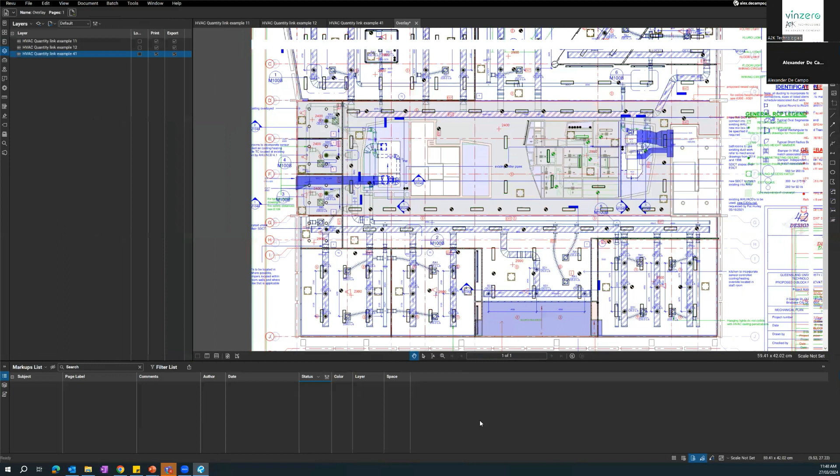To analyze this data accurately, it's a little bit much on the eyes all at once, so we can actually just reduce it to one at a time. Now we're just looking at one of our documents, and you can see how this works.

It's basically just chucked all the documents on top of each other, made some of them red, some different colors. Now it's all on top of each other. So when I turn one other drawing on, I've got red and green. Whatever's in red was on page 11 to begin with, whatever's in green was on page 12 to begin with.

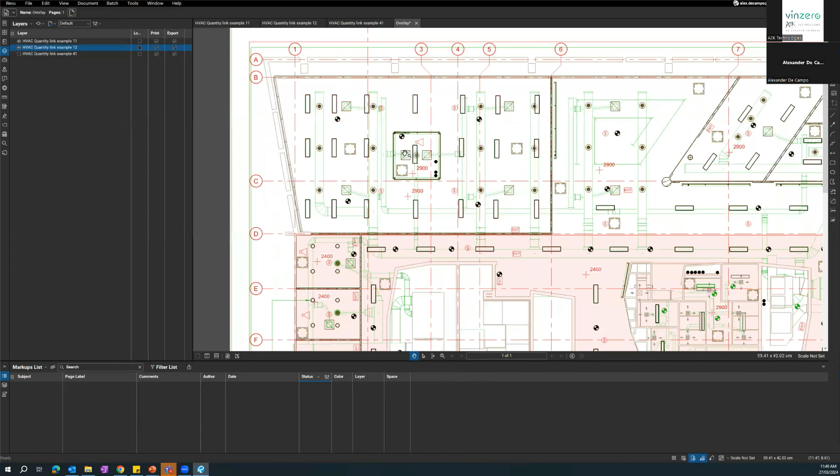So that allows us to look through anything that's in black is actually in the same spot. We can see these lights here are pretty much exactly in the same spot, with a slight bit of error because of our alignment process. So most of these are bang on in the right place.

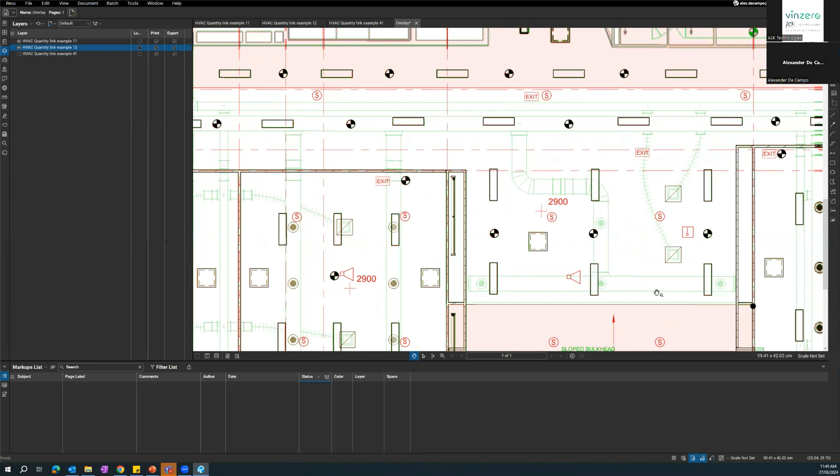What we are looking for is potentially some collisions. So on the side where these ducts are appearing, we want to make sure there's no overlaps. This might be an issue, for example - this is a duct that's coming out directly on top of another light.

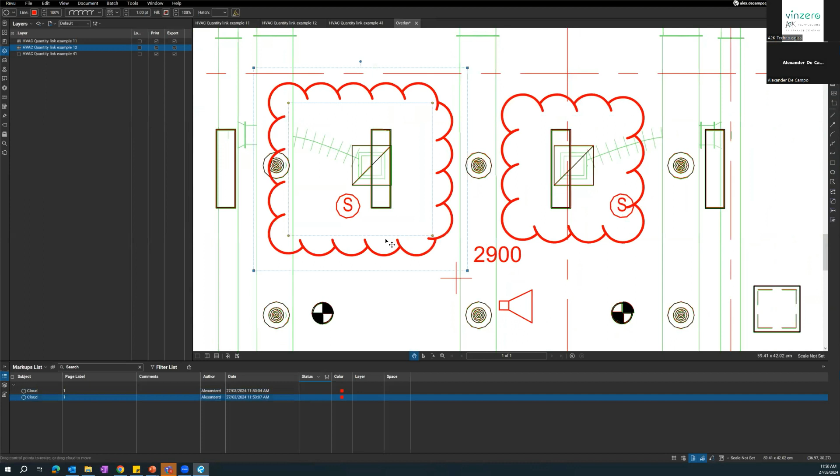So we can go through our process and highlight that sort of mistake if need be - highlight these, highlight this - and we can go through and get the experts on that. Say, hey, is this going to be an issue? Is that going to collide with that later on?

But yeah, super easy, and this is just a good way to do this process in the 2D environment.

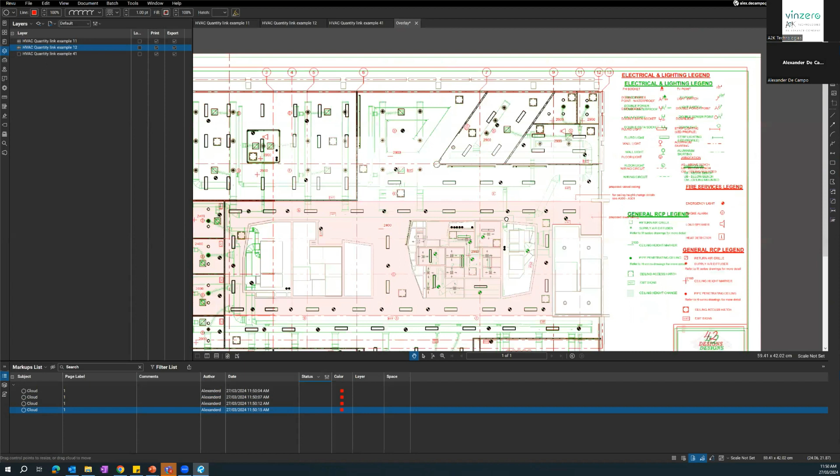The other side of it is, even though these were the same size, if you had a smaller drawing or a smaller scaled drawing, the alignment process will actually make the drawing bigger. So it can pretty much work for anything as long as the floor plan is the same.

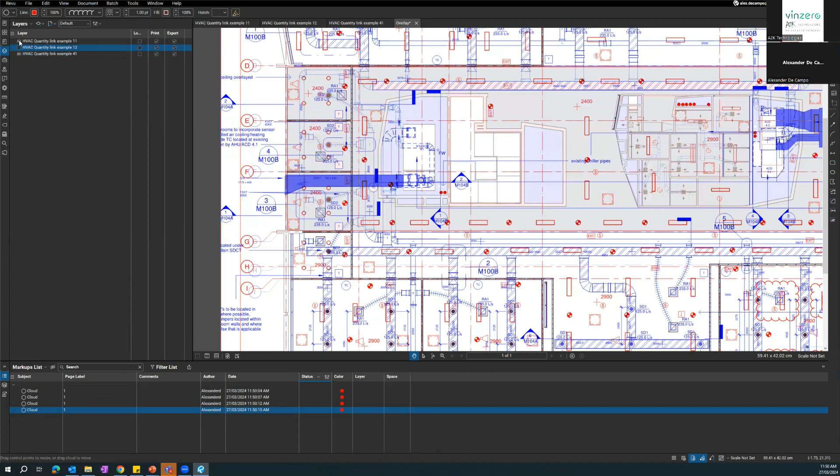But yeah, if we turn these on, we can have all three going at once. We can turn just these two on and then compare one with the other. We want to compare the first one with the third one - that's comparing our RCP only. And then we can go through, highlight where there might be issues, point out discrepancies, etc.

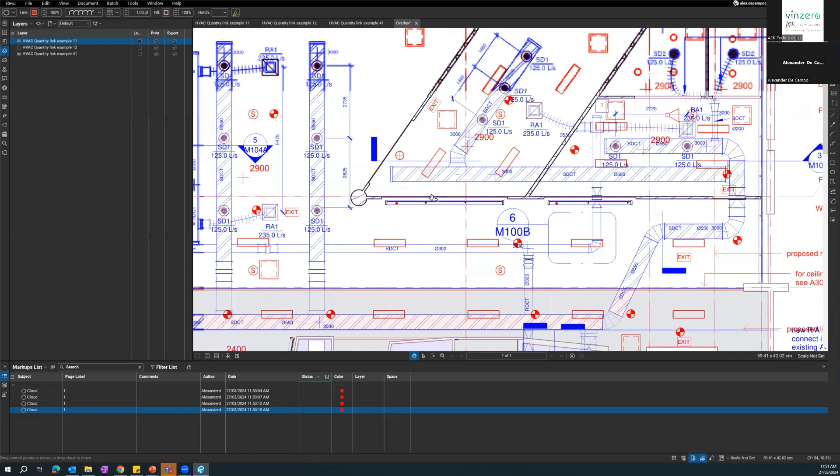So yeah, very unique way to use it, but sky's the limit with this sort of software because it is very dynamic.

Collisions is one thing - this might be an issue potentially, probably not because the ceiling light will be below the ceiling and the HVAC will be above it, but you get the picture.

So yeah, hopefully that was interesting. It's definitely not something I've seen commonly used, so I really wanted to show that off because it's quite a unique use case.

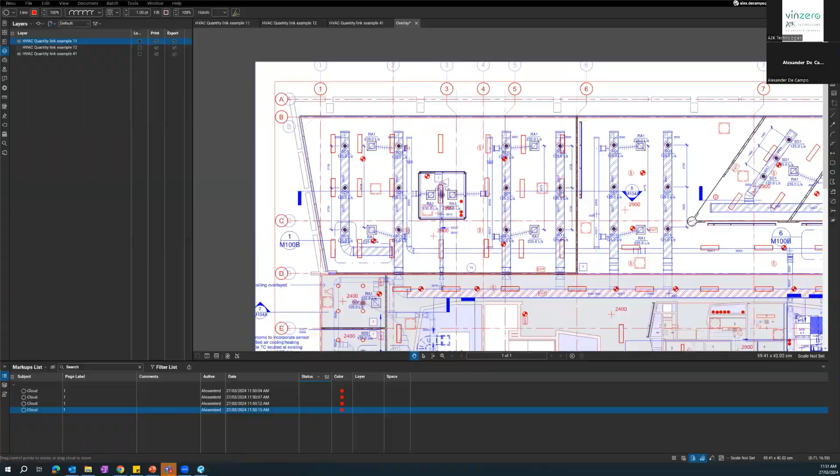Outside of that, that's our 50 minutes, so thank you very much for joining me. A bit of a unique session - let me know what you thought of that process. It's a bit different to how I typically do it, showing isolated tips and tricks. I really wanted to show the process as they fit in their environments or workflows.

So potentially that was a bit more confusing, maybe it was harder to understand. Let me know what you thought.

But yeah, that's three different processes. We started with that first one - if you remember that markups list - to show us how to do a document review start to finish. We also looked at those tool chests, how we can use Bluebeam to draft and draw on its own. And then finally, compare and overlay, we can actually use that for something more unique - clash detection, confirming that things are in the same spot and making sure the project's on the right track.

So yeah, those are our top three. Any questions, hit them up again.